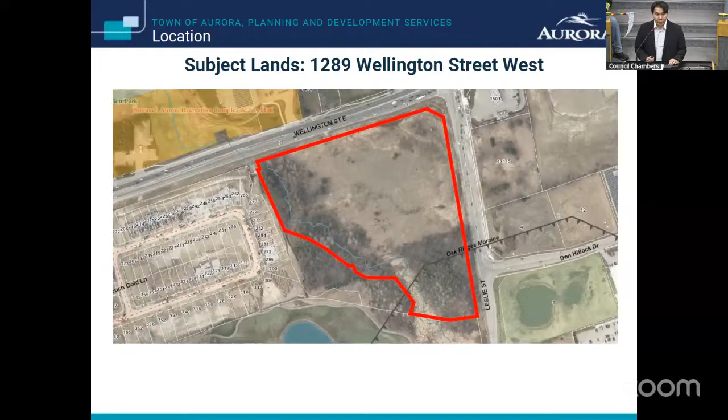The lands are currently vacant with no structures present at this time. However, the lands have areas of vegetation, woodland, wetlands, and a watercourse.

The surrounding land uses are as follows. To the north, Wellington Street East, Aurora Recreation Complex, a gas station, low-density residential development, and medium and high-density residential as per the recently approved LiveWell application for 30 townhouses and Polo Club application for 3 apartment buildings with a total of 345 units.

To the south, there is a golf course along with a low-density residential development. To the east, we have Leslie Street, another gas station, and vacant employment lands. To the west, a low-density residential subdivision.

The subject lands are designated in the town's official plan as medium-high density residential and environmental protection lands, with a site-specific official plan policy 66, which permits the use of detached dwelling units. There are currently no proposed amendments to the existing official plan.

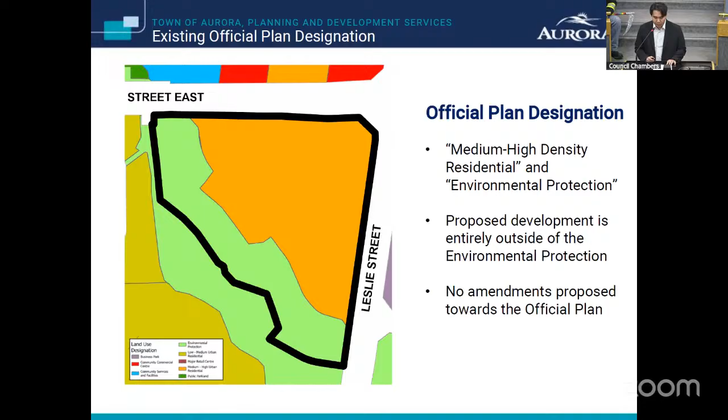The subject site, as per the town zoning bylaw 6000-17 as amended, is currently zoned townhouse dwelling residential R8 exception zone 558, second density apartment residential RA2 exception zone 559, detached fifth density residential R5 exception zone 560, and environmental protection.

As part of the zoning bylaw amendment, the applicant has provided a conceptual site plan. This site plan proposes a total of 125 residential units on the subject lands, consisting of 117 townhouse units as well as 8 single detached units.

The conceptual site plan offers approximately 500 vehicular parking spaces, of which the average dwelling consists of 2 parking spaces inside the garage and 2 on the driveway. An additional 32 spaces are proposed for visitors throughout the site. The conceptual site plan also proposes signalized accesses off of Wellington Street and Leslie.

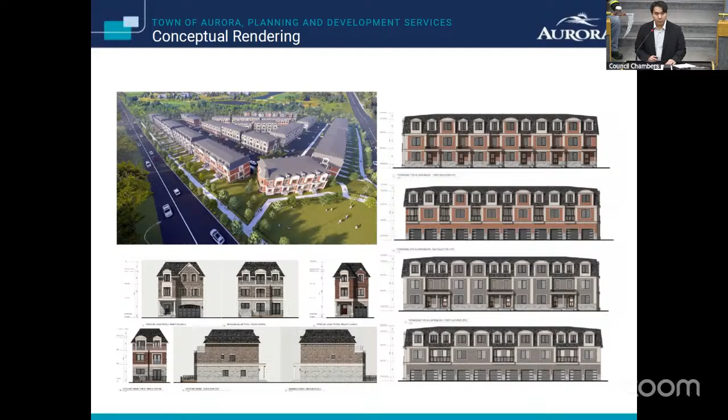The proposed zoning bylaw amendment seeks to rezone the subject lands by removing the second density apartment residential RA2 exception zone 559, and updating the existing townhouse dwelling R8 exception zone 558 and fifth density residential R5 exception 560 zones. No changes are proposed for the existing environmental protection zones.

Final zoning performance standards will be evaluated by staff in detail prior to the implementing zoning bylaw amendment being brought forward to Council for enactment.

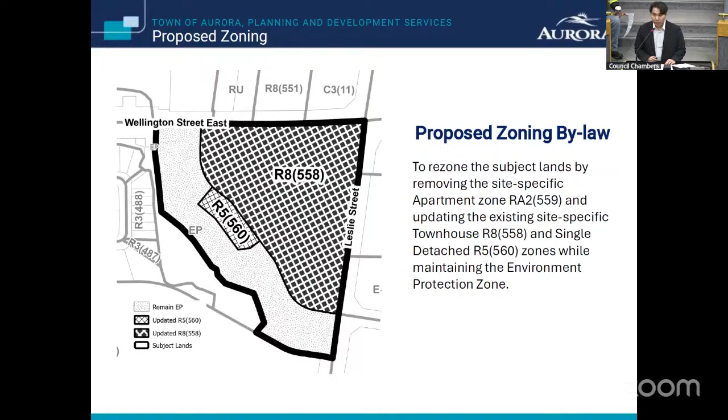The proposed draft plan of subdivision will divide the subject lands into 2 large blocks as follows: Block 1 for development lands at approximately 9.15 acres, and Block 2 for environmental protection lands at 5.28 acres to protect areas with key natural heritage features.

A common element condominium development is proposed for the subject lands. No public highways or lots will be created through the draft plan of subdivision. Instead, the enactment of a future part lot control exemption bylaw to subdivide Block 1 will be required to create the lots, and a future condominium plan will be required to create the private roads.

A 0.3 meter reserve is proposed to restrict and control future connections to the adjoining public right-of-way, identified as Block 3 on the proposed draft plan.

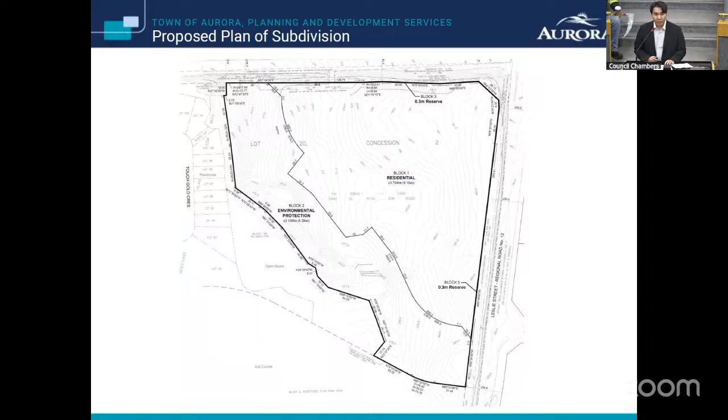Additional matters to be addressed in the processing of the application include conformity to local and provincial policies, location and placement of future signalized traffic lights, and the availability of municipal services.

The next step for the application is for staff to take comments from tonight's discussion and provide council with a recommendation report at a future committee of the whole meeting. This concludes my presentation, and if there are any questions, I'll be happy to answer them.

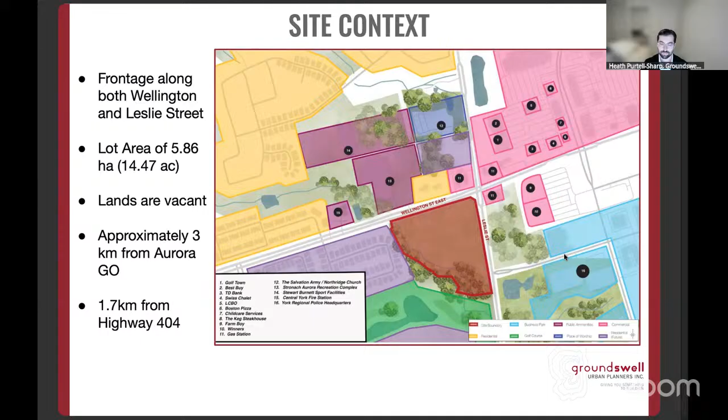The proposal before you this evening is for the zoning bylaw amendment application, which seeks a revised zoning for these lands based on a revised development proposal that now only includes townhouses and single detached dwelling built forms, which removes the previously proposed 7-storey apartment buildings. We have 117 townhouse units, 8 single detached units, and all at a maximum height of 3 storeys for a total of 125 units. This reaches approximately an overall density of 34 units per hectare.

We have a total of 520 parking spaces being proposed, which includes both garage parking spaces and driveway parking spaces, along with some dedicated visitor street parking. There is no underground parking structure proposed for this development anymore. Both the townhouses and the detached dwellings have a minimum of 2 parking spaces, being 1 in the garage and 1 in the driveway, up to 4 parking spaces, being 2 in the driveway and 2 in the garage per unit, based on the different unit configurations. In addition, there are 32 dedicated on-street visitor spaces.

It's worth noting, and I want to point it out to everyone here this evening, that the development proposal maintains the same limit of development that we established through the previous applications. This was worked through in consultation with the Lake Simcoe Region Conservation Authority from 2021 through till 2024. This includes site walks, staking exercises, the submission of our technical environmental impact studies, floodplain analysis and meander belt studies, and included separate submissions and reviews with the Conservation Authority through this process as well, to ensure we're providing the appropriate setbacks and buffers for that established environmental protection zone.

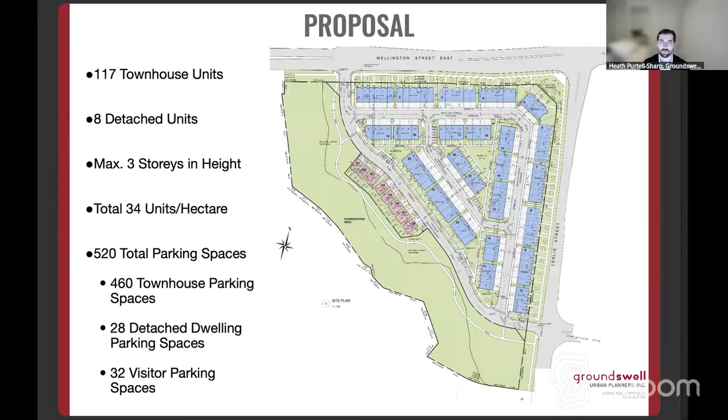As Peter mentioned, the lands are designated medium to high urban residential and environmental protection. The developable lands are contained entirely within the residentially designated lands, with the EP lands proposed to remain as an environmental conservation area and to accommodate a naturalised trail consistent with the town's trails master plan. The lands have site-specific policies which permit the proposed townhouse and detached dwelling built forms at the 3-storey heights. The site-specific policies also permit a density of up to 201 units per hectare; however, this proposal falls significantly within that maximum at a density of only 34 units per hectare. We're not seeking any amendments to the town's official plan through these applications.

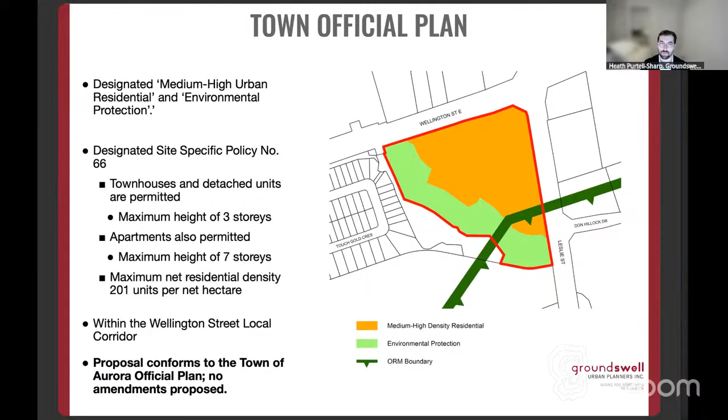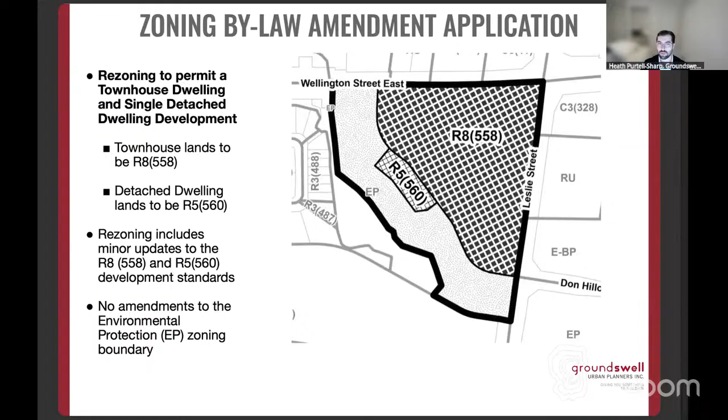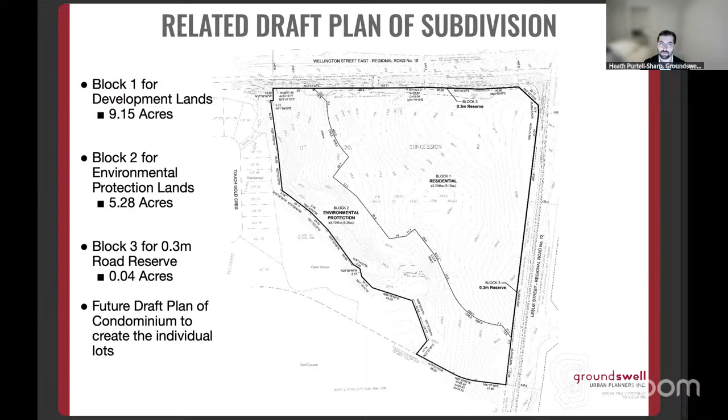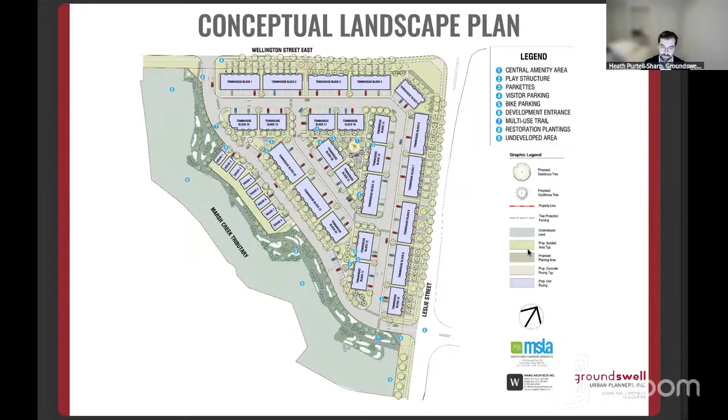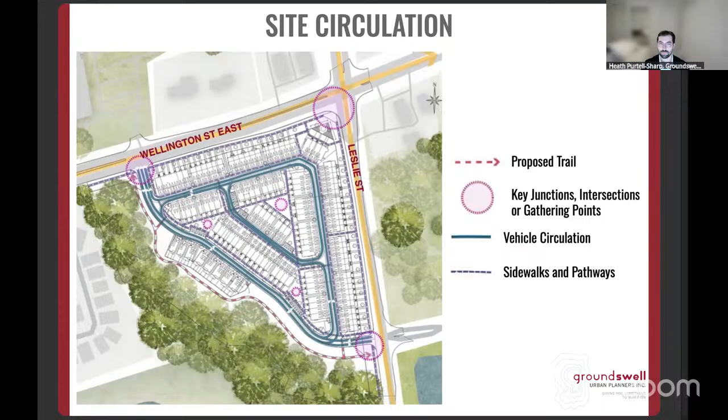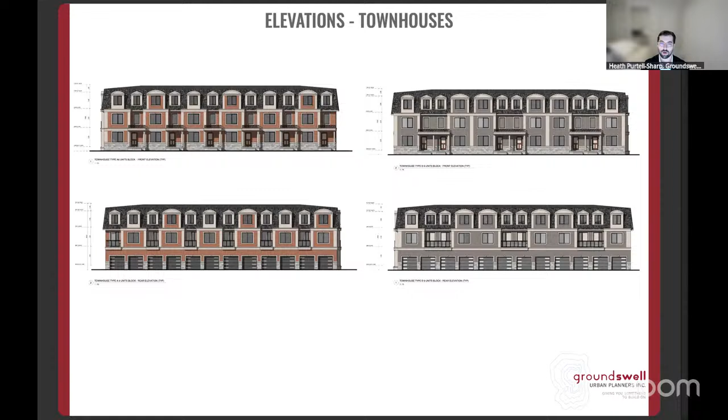Moving along to the typical townhouse elevations, here we have two different types of townhouses. Both designs are intended to be used within the development. They're similar in design, but have a mix of material and colour palette to break up and create some visual interest for the public realm.

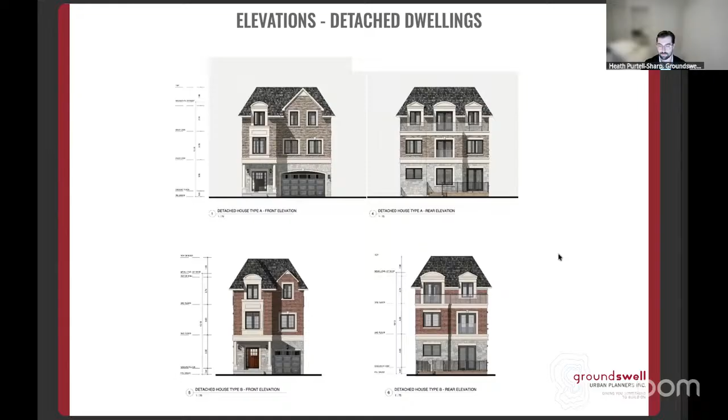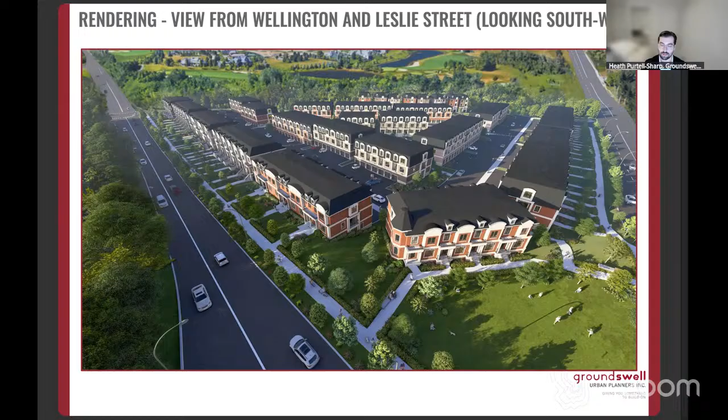And here is an internal conceptual rendering showing the conceptual design of the townhouse buildings internal to the site.

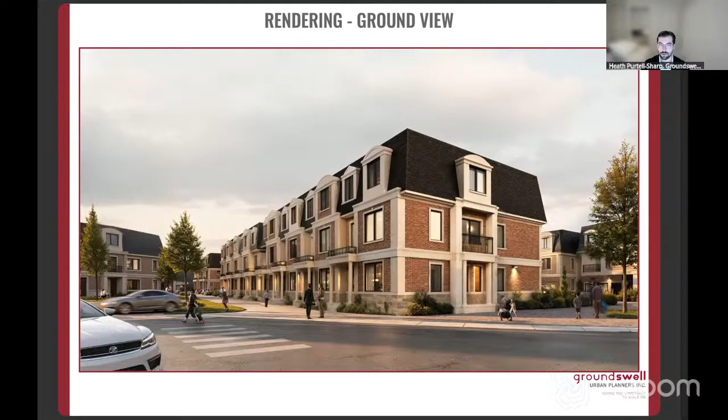Thank you on behalf of Groundswell and the applicants. We'd be pleased to answer any questions or take back any feedback for consideration.

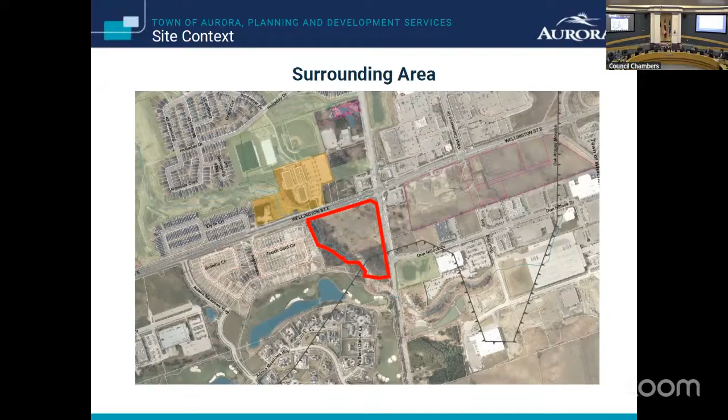Thank you. Next one. Keep going forward. That's the one. No, you want the next one, Counselor. The right one, next one. There you go. Thank you. Okay, go ahead, Counselor.

So, first of all, what is the white line that goes from top to bottom? As I said, I believe that's the trail, but Mr. Romano, go ahead. That's the trail. Mr. Romano's nodding, yes, it's the trail, Counselor. That's the trail. Thank you.

How far is it away from D2? The trail? Yes, Counselor. Mr. Romano, do you know how far the trail is from D2? Peter, do you know the distance from D2 to the naturalized area, to your environmental protected area? Through you, Mr. Mayor, I'll have to take a look. Currently, I don't have that number.

Okay, we're not going to get that number tonight, thank you, not only for the naturalized area, also the trail, because I anticipate, as we've had many times in the past, that the people in D2 and D3 might not be happy about that trail. So is there going to be, it looks very close to their backyard, is there going to be any planting there so that they're screened from the trail?

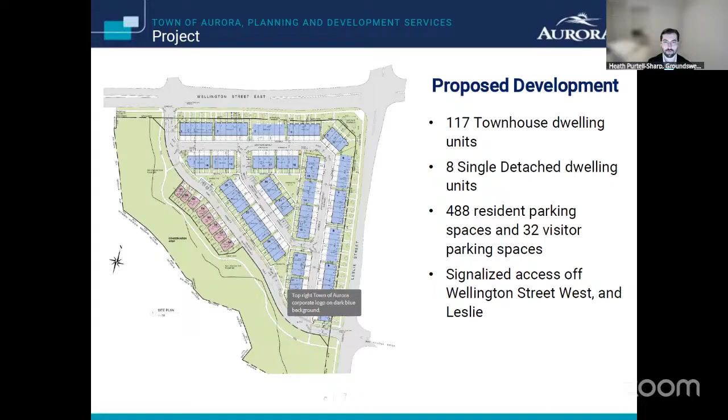Yes, I'm happy to take that one. We are in discussions with York Region, and we have a meeting with regional staff and town staff this week to discuss the signalization of both intersections. The region has criteria on when it warrants having signals, and our preference is to provide signalized intersections, so we're just discussing the feasibility of ensuring those can be accommodated.

Councillor: Thank you. I think that if this passes and a report comes back at general committee, that's one of the questions that should be within the report. As we've seen with other developments, I would rather deal with this in the initial phases and make decisions with respect to it rather than dealing with it after the fact when residents come to us asking for it because there are obvious issues.

I think my second point is more towards our own reporting. It is referenced in the application history that there currently are already approvals in place for 4 seven-story buildings, 698 units. It's not often we get applications that actually see a decrease in the overall density.

I think it would be good because while I'm sure all members of council are quite familiar with the history of this site, there should be a little more detail in any report going forward, so that the public, and specifically residents in that area, have a better understanding of the history and what is actually allowed here. I've heard comments from some residents that they'd like to see fewer units. While I understand that, it's important they understand that the developer today could build significantly more than that, so it's good for them to have all the facts and the whole picture.